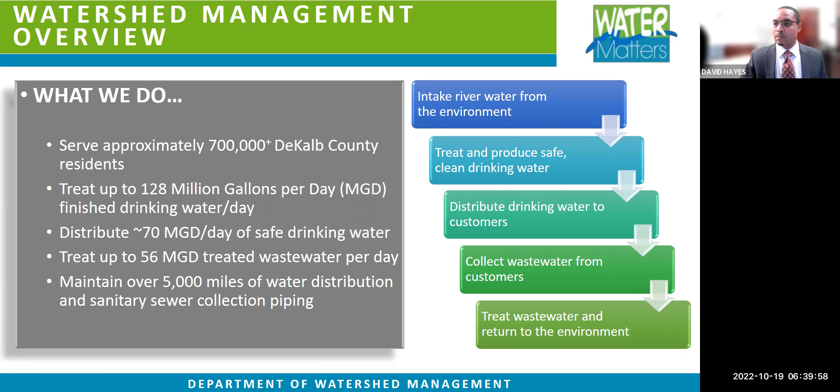Again, what are we trying to get out of this? Why are we doing this? We have an aged infrastructure, and it's no secret around DeKalb County that some of the pipe is more than 60 to 70 years of age and has far outlived its useful life. So what we're trying to do is renew this pipe with new pipe, and not just renew it, but upsize it where need be. Doing that will improve our customer service to you and reduce some of the overflows that we have in the area. Once all that's done, it's going to yield a better, improved, robust system that will allow more growth and reliable service for years to come.

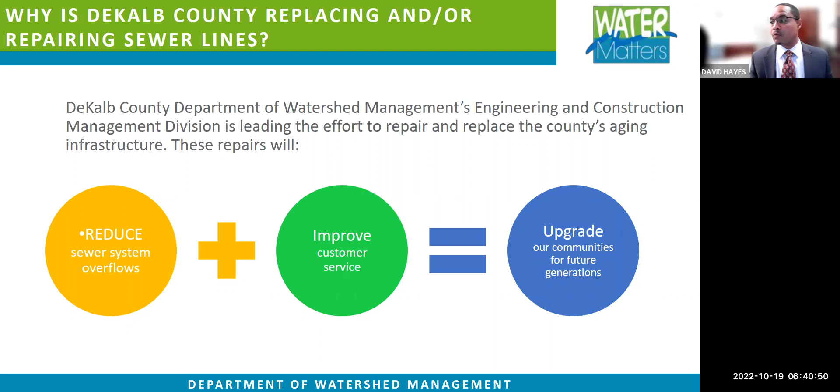To do this, we've put together a team comprised of an engineering firm to help us design, a construction firm that helps us put the boots on the ground, the pipe in the ground, and a slew of others. All these people will be led by DeKalb County Watershed's own engineering team. We do this so that we can ensure an on-time, successful project on budget.

Next, you're going to hear from the engineering manager, Mr. Kerry Williams. He's going to give you a little background about the assessment of the situation, the assessment of the infrastructure. Mr. Williams, please.

Thank you, Director Hayes. My name's Kerry Williams. I'm the engineering manager for DeKalb County Watershed, and I'm supported by a team of 11 engineers along with 4 consulting engineering firms to help us do this type of work. What I'm going to do right now is tell you a little bit about the assessment—how we assess the pipes and discover defects in them. Then I'll follow up with the problems we found from the assessment.

Just a little background on the gravity sewer system: if you're not familiar with how it works, most homes and businesses are connected to the DeKalb County sewer system via laterals from your property to the sewer line, which resides within the right-of-way, typically in the street. Sometimes it may run on private property through dedicated easements behind your house, so you may see it here and there. The sewer system itself is a gravity sewer system.

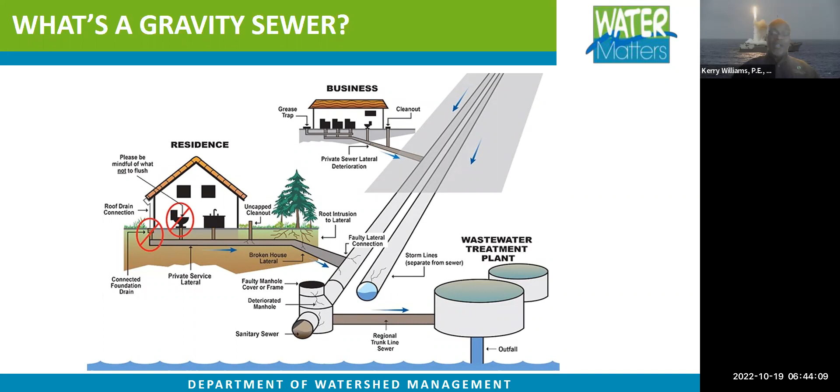We also do assessments based on SSOs, sanitary sewer overflows, and repeat spills. We do them from visual observation from staff and residents as well.

We also do CCTV, actually running cameras through the pipe. This is very effective to do a visual inspection inside the pipe and look for defects - cracks, roots, all kinds of things we find in there.

We also do acoustical testing - the use of sound to categorize our sewer flows. This can be used to find leaks in the sewer system as well.

We also use hydraulic modeling. This is the installation of flow monitors into manholes. We measure the flow during dry weather, then wet weather events. This is how we can determine if a manhole or something has surcharged.

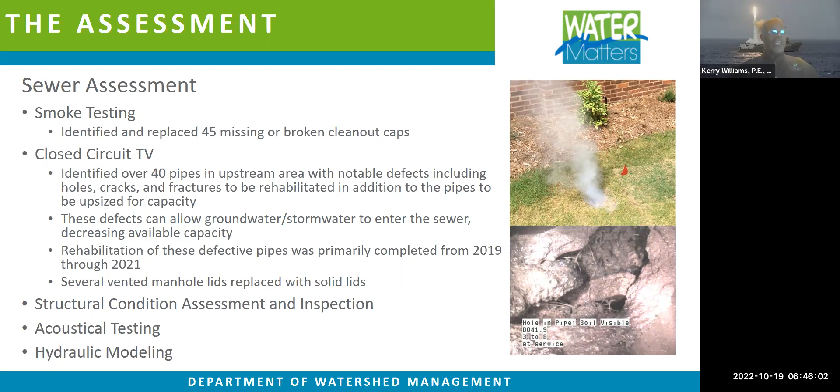So what did we find? This is the problem. So far you've heard about how we assess the pipe defects. Now I'm going to discuss the problem of what we found from our assessments.

Part of the problem is, as Director Hayes told you earlier, we have aged infrastructure - our infrastructure rate is 70+ years old. We have undersized pipes. A sewer line was built years ago for 3 houses; now we're serving 500 houses. It's undersized, it's over capacity, under capacity now.

We have operational efficiencies in the system. Again, sewer should flow downhill, but we have pipes with reverse slope - they slope the other way, so sewage is trying to go the other way. That causes overflows and backups in the system as well. We have cracked pipes. And so we also have lack of capacity, as I just spoke earlier - pipes that are too small in diameter, and we need bigger pipes.

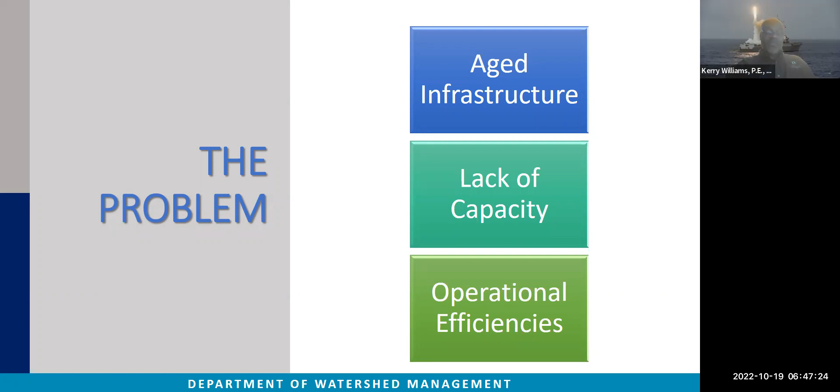And so this project here will actually address some of those issues. To tell you more about this, I'm going to turn it over to Ms. Cassandra Marshall, and she will tell you how we plan to address the problems that we have assessed. Ms. Marshall, it's yours.

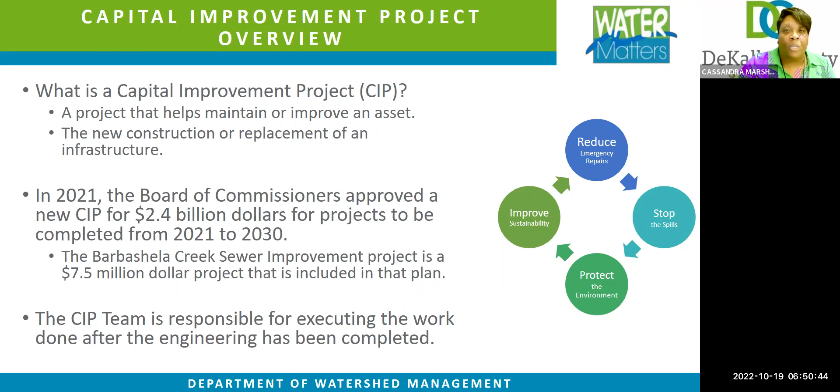You will now hear from the engineering project manager, Ms. Tiffany Simpson.

Good afternoon, everyone. My name is Tiffany Simpson. I am the project manager for Barbashela Creek. I will be working closely with our Garney Construction and other key personnel to ensure that we stay within scope. I do oversee budget and that this project is completed on time.

I'll talk about some preliminary work that has already been done between November 2016 and December 2020. We did do some survey and assessment. Kerry talked about the CCTV work and some smoke testing that we've already completed. Wetland survey, and of course, pre-construction where we completed design and the permitting process.

Here we are, October 2022, and this project is to be completed by December 2023. Right now, we are in the process of engaging the community with the community meeting. We'll move to construction, and then we'll move to restoration where we make sure the roads and streets get repaired and landscaping is done.

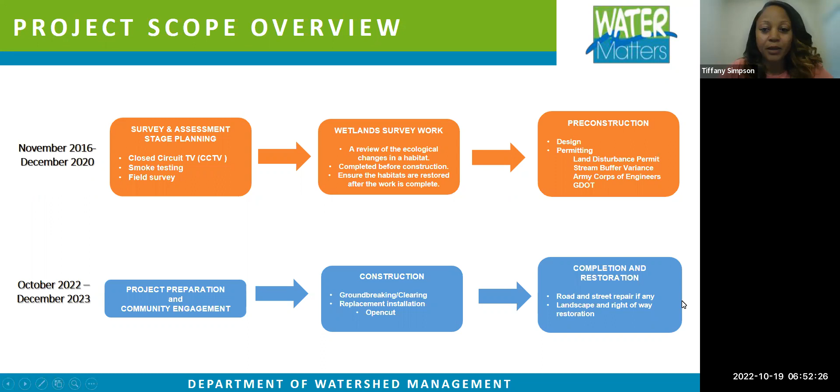So the project scope, some planned work that we have, this includes approximately 6,437 linear feet of upsizing, replacing existing 15-inch pipe to 20-inch and the 18-inch to 24-inch pipe. This will be mainly open cut construction, and it does include also 34 new manholes.

So this project is anticipated to begin October 24th. That is next Monday, so it's around the corner. We'll get started with this project, and again, we do plan to have it completed by December 2023.

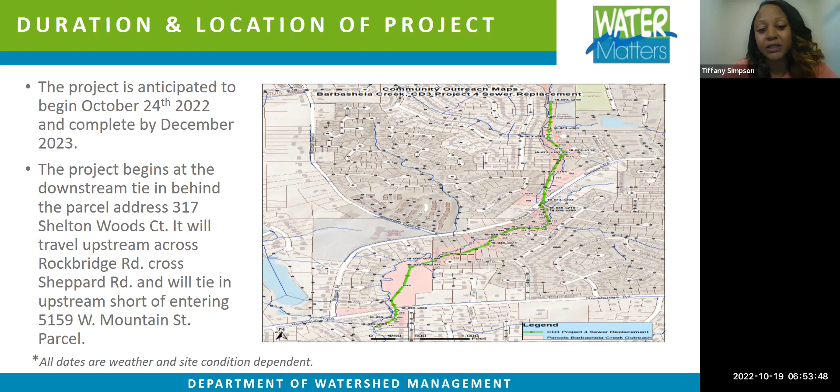We do cover a pretty large area. You can see in the map, the project begins at the downstream tie-in behind parcel address 317 Shelton Woods Court, and it will travel upstream across Rockbridge Road, crossing Sheppard, and will tie in upstream short of it, entering 5159 West Mountain Street parcel.

Okay, now I will turn it over to Mr. Kennedy, and he'll get more into the construction aspect of the project.

Thank you, Ms. Simpson. My name's Arre Kennedy, and as stated, I'm a licensed utility manager for the state of Georgia, and my team and I, next slide please.

My team and I are boots on the ground, which consists of both consultant and county inspectors. We're responsible for the construction activity from day one, which includes but not limited to clearing within the right-of-way, ensuring that all erosion and sedimentation controls are in place, ensuring the proper installation of the pipe is done, and ensuring all safety measures are adhered to by the contractor.

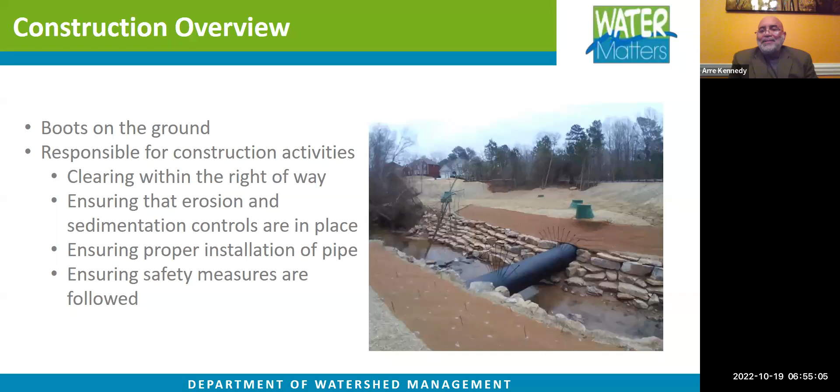This method of replacing and upsizing this pipe, if you heard from Ms. Simpson, is the open cut method. Traditional method for sewer construction, repairs, and replacement. It's the most economical method of construction to achieve the county's desired results for the gravity sewer projects. It also provides the service best suited to the scope for this project and the best price, being mindful of the ratepayers' pocketbooks.

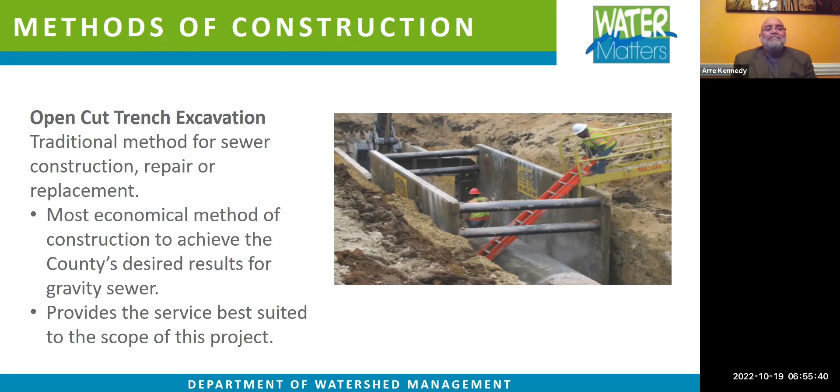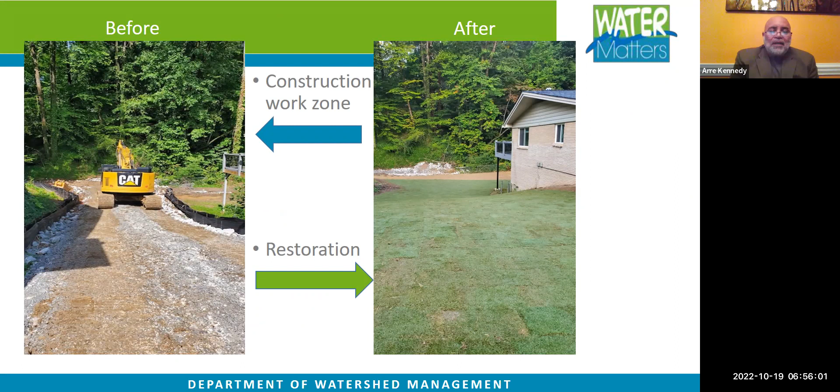Thank you, Arre. I will now address community concerns.

So what should the community expect? Well, unfortunately, what comes with construction are inconveniences. You're going to see a lot of construction traffic, foot and vehicle. There will be construction workers, surveyors, and county employees throughout your community. There will also be parking for the crew workers, who will be parked alongside the streets in your neighborhoods and sometimes along the work zone. There will be material and equipment deliveries by large tractor trailers, and crews will guide these large vehicles in and out of the community.

In addition, there may be dirt or silt on the street. As an erosion control measure, the contractor will first install a construction entrance and exit prior to starting construction activities. This will reduce tracking of silt on the streets, but not fully eliminate the issue. If silt is tracked onto the streets, the contractor will be responsible for keeping the streets clean and swept daily.

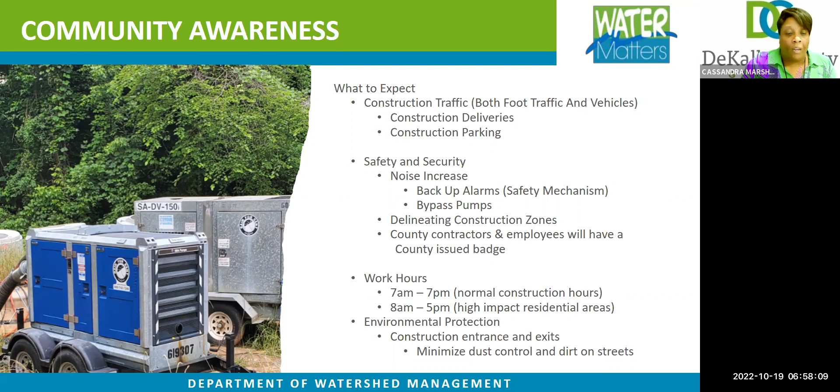Work hours will vary based on the location of where the crews are working. Our typical work hours are from 7 a.m. to 7 p.m., sometimes including weekends and holidays. However, in high impact residential areas, we will only work from 8 a.m. to 5 p.m. Lastly, there will be clear delineation of work zones, usually shown by installing silt fence along the temporary or permanent easement and along ingress and egress areas.

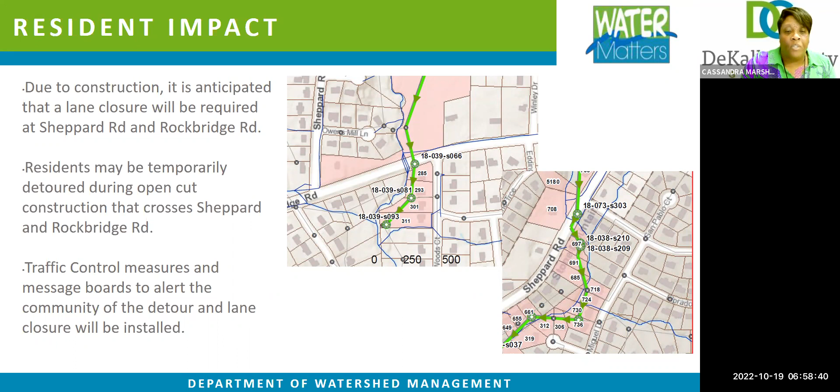Resident impacts: due to construction, it is anticipated that a lane closure will be required at Sheppard Road and one at Rockbridge Road. Residents may be temporarily detoured during open cut construction that crosses Sheppard Road and Rockbridge Road. Traffic control measures and message boards will be installed to alert the community of the detour and/or lane closures.

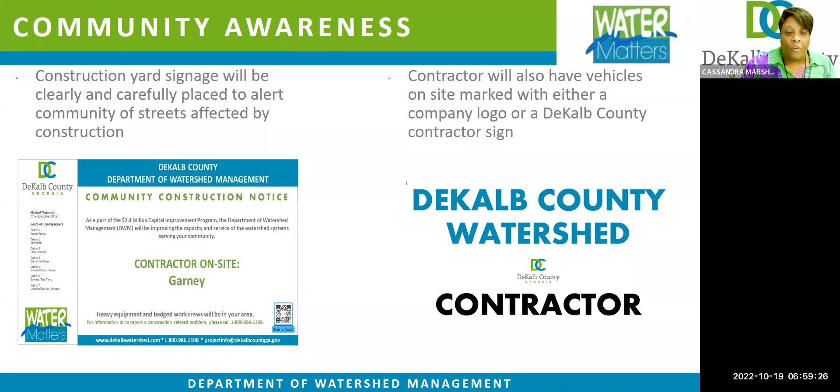Next, you will hear from the public relations manager, Ms. Alicia Penny.

Thank you, Ms. Marshall. Good evening, everyone. My name is Alicia Penny, and I am the Public Relations Manager responsible for communications and outreach for the department. Tonight, I will share the methods DWM will use to communicate with you about this project. But before that, I want to briefly recap what has occurred so far within the community. Our outreach team has already engaged with residents we consider to be in the high impact areas related to this project. Also, our construction and engineering teams have worked with residents to obtain any access needed to their properties.

We will also use the GovDelivery e-blast notification service to communicate with you. At this time, I want to stop and ask, if you haven't done so already, please provide us with your email address in the chat so we can capture that information for future use. We will use that to communicate key updates about the project.